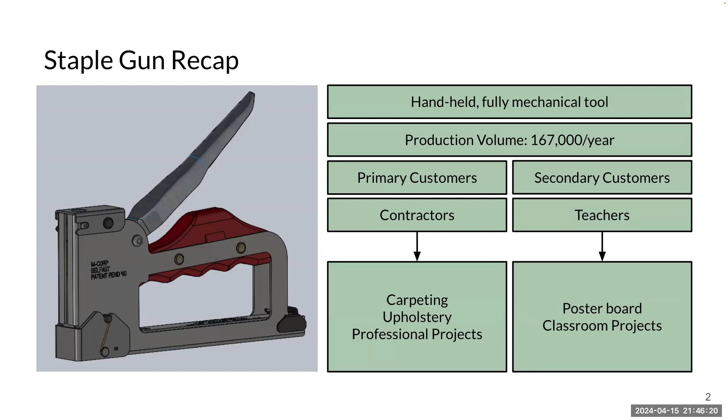Hello, everyone. This is our final presentation on the analysis and redesign of the staple gun. So just to recap, the staple gun is a handheld, fully mechanical tool with a production volume of 167,000 per year. Our primary customers are contractors who are using it for carpeting, upholstery, and professional projects. And our secondary customers are teachers using it for poster boards and classroom projects.

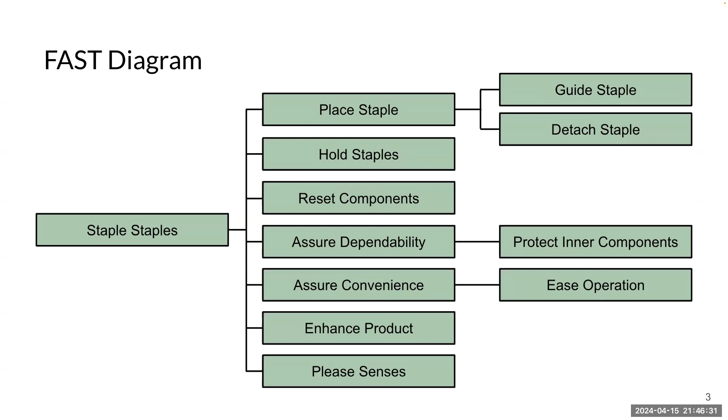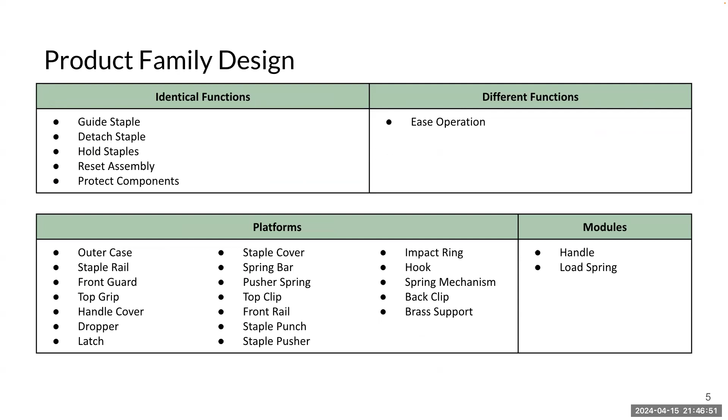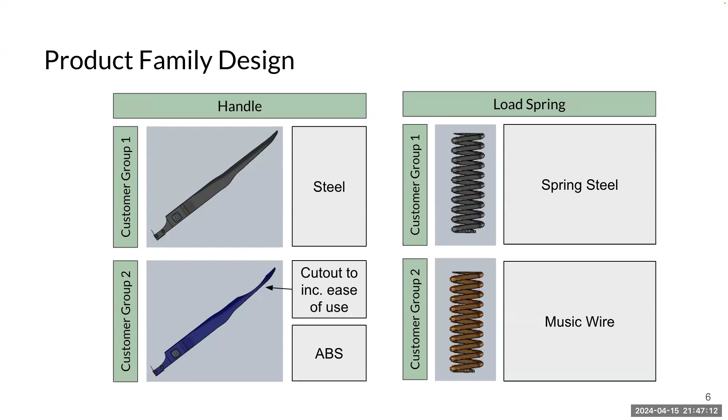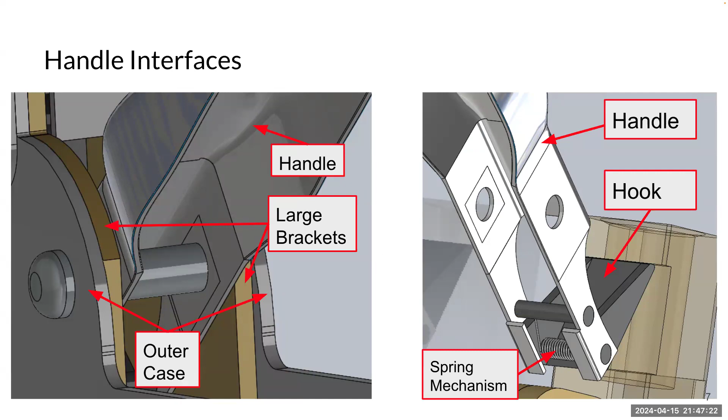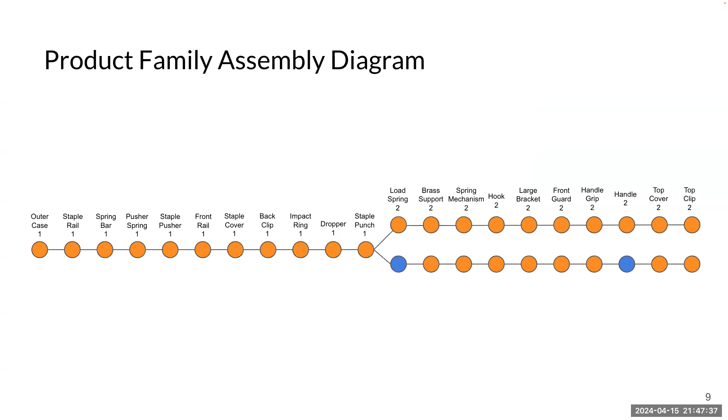This is our product family assembly diagram that has been updated, and it has been built for delayed differentiation. So designing for automated assembly, the main platform component we wanted to focus on was the dropper due to its high functional importance and high manufacturing cost depicted by our quad chart. The components directly before and after the dropper in the assembly sequence are the impact ring and staple punch, respectively. So this was our subassembly of focus to design for automated assembly.

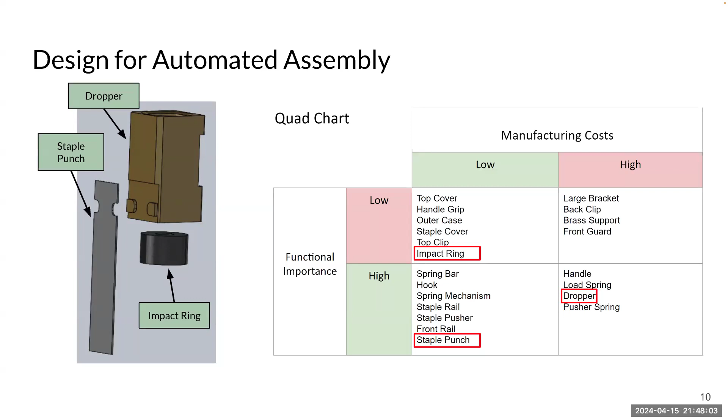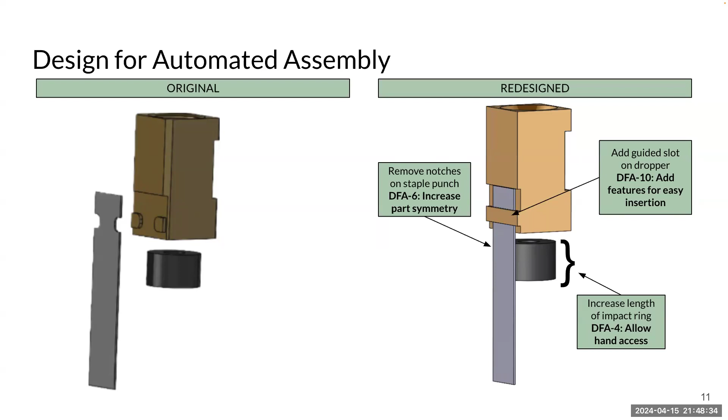In order to improve the total assembly cost of this dropper subassembly, we used the design for automation guidelines to implement 3 design changes. The first change was to remove the notches on the staple punch, which increased the part symmetry. The second change was to add a guided slot in the dropper, which allowed for easier insertion of the staple punch. And finally, the last change was to increase the length of the impact ring from 9 millimeters to 10 millimeters, recategorizing the part from being very small to just small, which allows for easier part access throughout the assembly sequence. As a result of these design changes, we were able to modify some of the automatic handling codes and insertion codes surrounding the dropper subassembly, and it ultimately decreased the total assembly cost by $8.64.

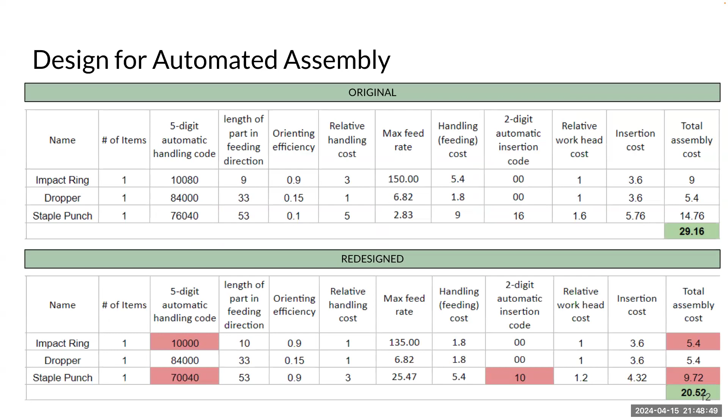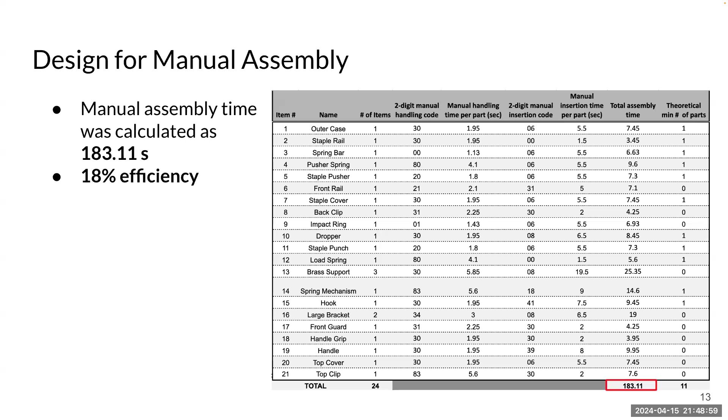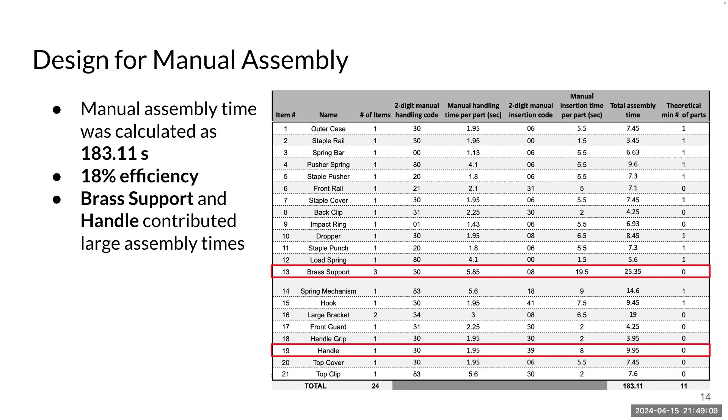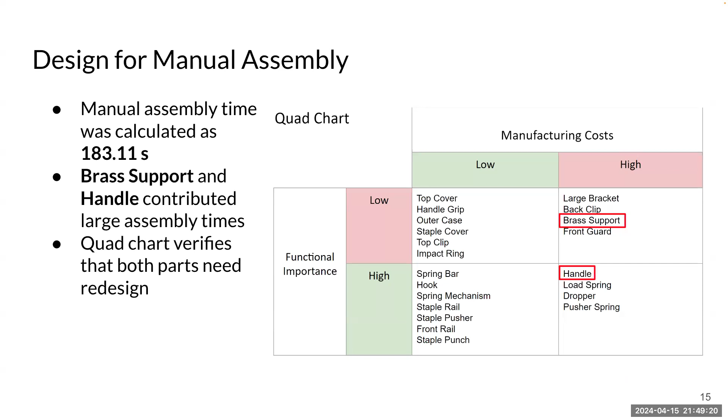The manual assembly analysis was performed for our primary product variant, and the total assembly time was found to be 183 seconds with an efficiency of 18%. A platform part that contributed largely to the assembly time was the brass support, and a module part that had a high assembly time was the handle. Since the handle has a high functional importance as shown in the quad chart, it is important that we redesign it for lower assembly time. The brass support has a lower functional importance, so we tried to reduce its number of parts.

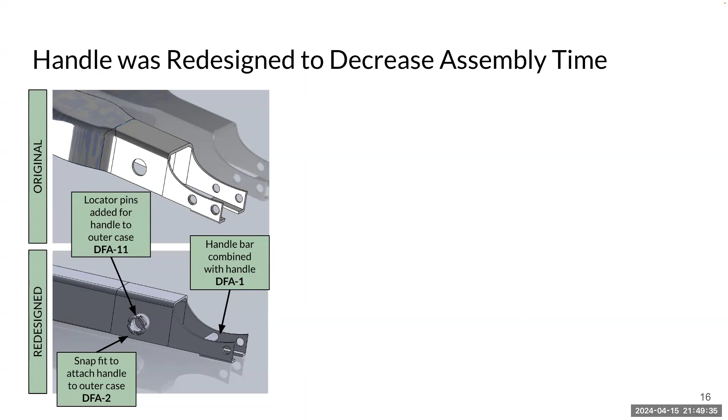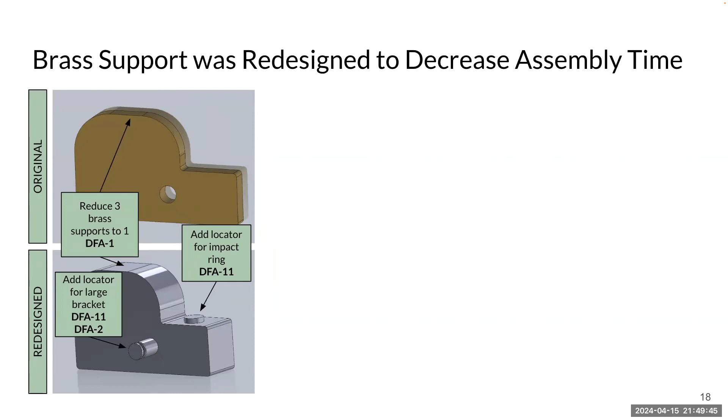The handle was redesigned by adding locator pins and a snap fit for attaching it to the outer case, and the handle bar was combined with the handle to reduce the total number of parts. This reduced the handle assembly time by 6 seconds. The brass support was redesigned by reducing the 3 supports to 1. A locator for the impact ring was added, and a locator for the large bracket attachment was also added, which serves to reduce a fastener. This reduced the assembly time by about 18 seconds.

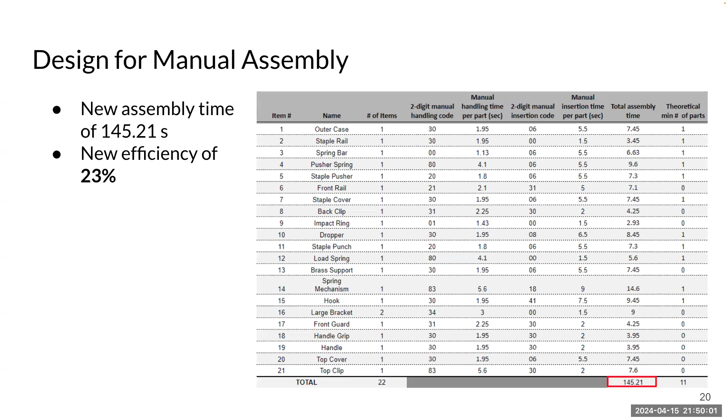All in all, these redesigned parts reduced the total assembly time by almost 40 seconds, and we have a new efficiency of 23%. However, the addition of these locators and snap fits may lead to an increase in manufacturing costs, and the thicker brass stock will likely increase our material costs.

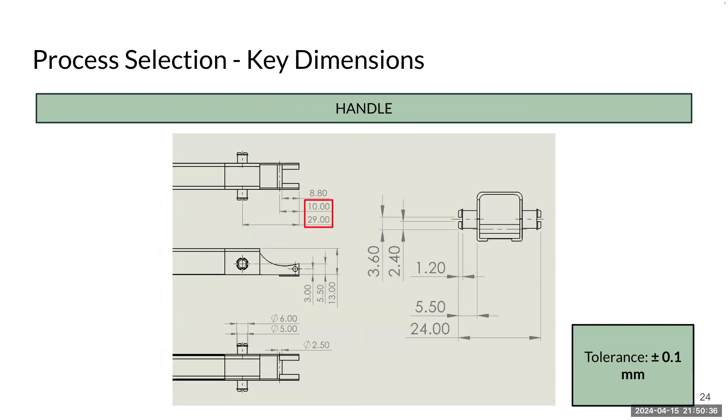We'll now be going into the process selection for which manufacturing process was used for both the handle and the brass support. Shown here are the key dimensions of the redesigned handle. The handle serves to detach staples and ease the operation for its user. Because of this, the most critical dimensions are on the locations of the handlebar and the snap fit. The handlebar is critical for the spring mechanism used to detach the staple, and the snap fit is crucial to hold the assembly together. The tolerances were chosen to be 0.1 millimeters.

Utilizing the 7 process capabilities, we selected 2 candidate manufacturing processes and ultimately chose sheet metal working to manufacture the handle.

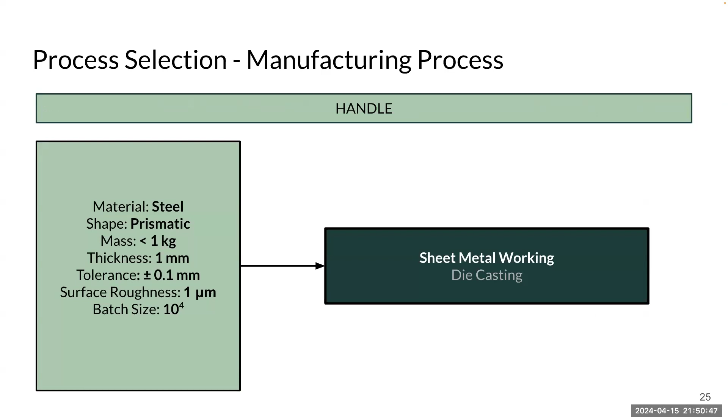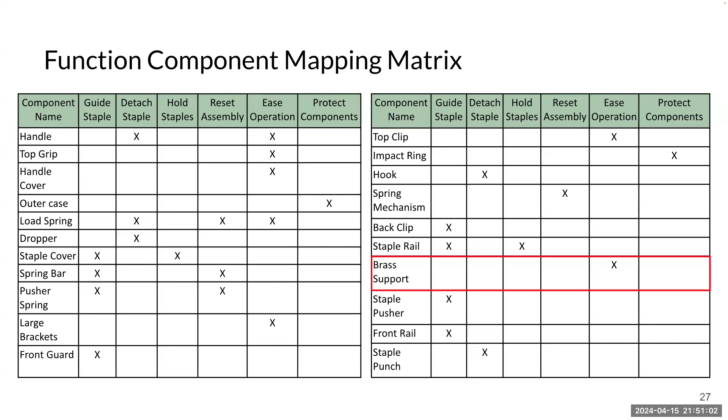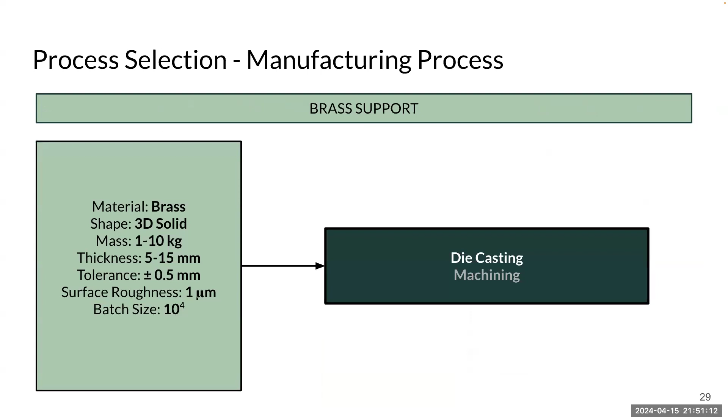So now diving into design for manufacturing for the handle. Before we made alterations to the handle, we first got cost estimates for the price per part. First, using the analytical method and the equation shown above, we estimated that the cost would be roughly $1.95 per part, mostly driven by the high material cost of the stainless steel. And then inserting this part into HUBS and extrapolating for our volume size, we estimated that the price per part would be roughly 10.1 cents.

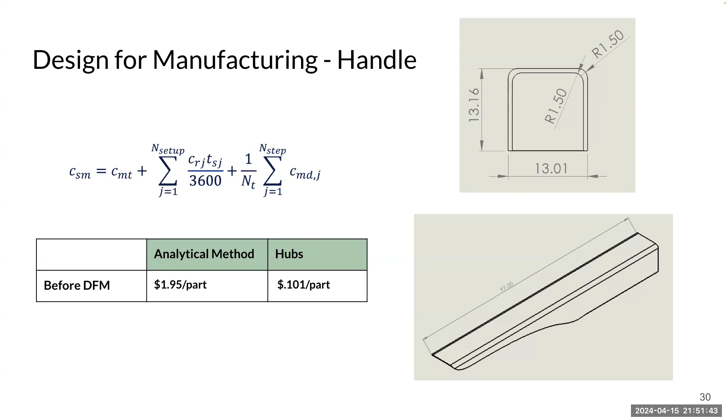Moving on, post DfM, we made some alterations using design for sheet metal working guidelines. As you can see, we added bend offsets to the corners to allow the sheet metal to warp as it bends. Additionally, we avoided sharp bends, ensuring that both radiuses are less than the thickness of the steel. And then finally, we got rid of sharp corners on the part, which was another guideline for sheet metal working.

So as you can see, post DfM, we estimated the analytical method would be $1.89 per part, while HUBS got slightly cheaper at 10 cents per part. All in all, post DfM, the handle was 6 cents cheaper.

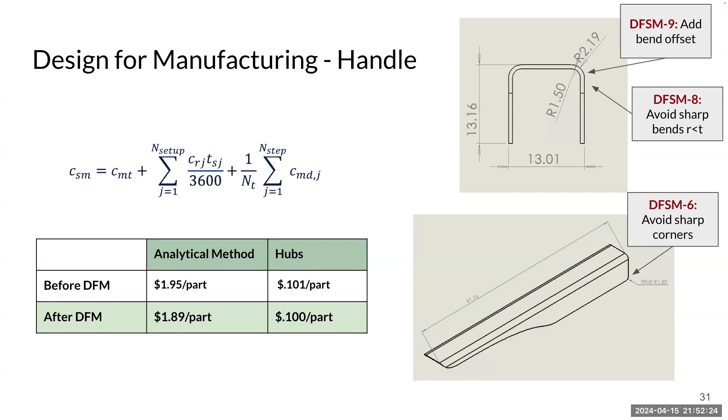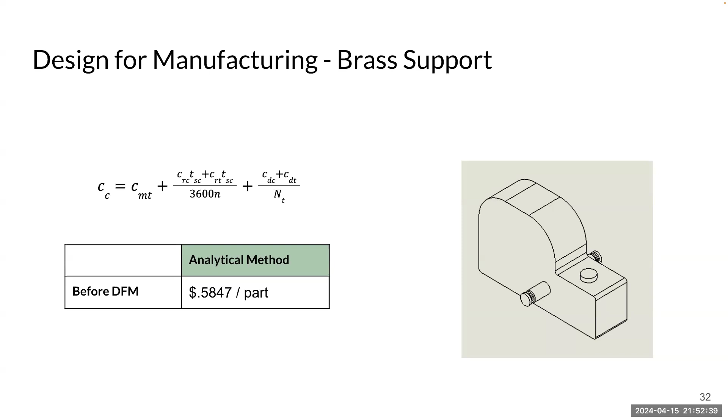The second part we chose to redesign was the brass support. Using the analytical method with the equation shown above, we found that prior to redesign, the total cost for the brass support was 58.5 cents per part. We then redesigned to optimize for die casting by avoiding sharp corners and adding draft angles, which then reduced the cost to 44.5 cents per part.

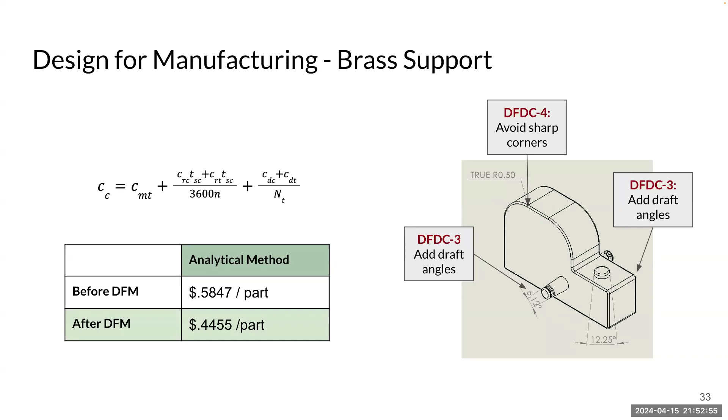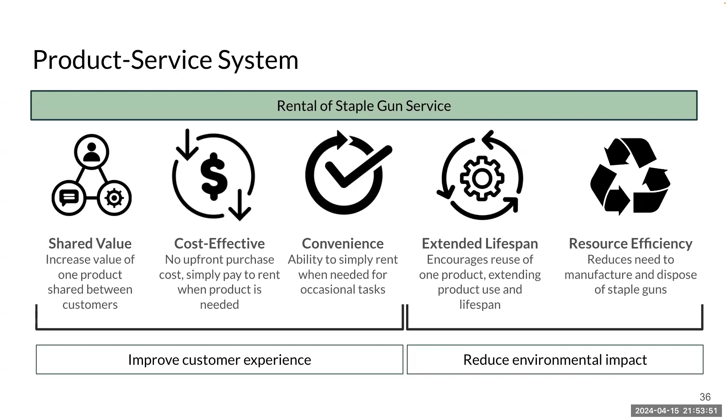Moving on to reducing the environmental impact, it would provide an extended lifespan. So it encourages the reuse of one product, which would ultimately extend the product use and lifespan. It also would be more resource efficient. So it would reduce the need to manufacture and dispose of staple guns, overall reducing environmental impact.

So onto our conclusions. In total, we had a 37.9 second reduction in total time. For the handle, it was a 6 second reduction, and for the brass support, it was a 17.9 second reduction. For the automated DFA, we saved $8.64 per assembly. For the DFM for the handle, we saved 6 cents per part. For the DFM for the brass support, we saved 14 cents per part.

So overall, the main pro of our design is that it saves money and time, and it's a lot more accessible for both of our stakeholder groups, as it improves the ease of operation for both groups. However, the biggest con that we have is that the material of the handle is still expensive, and overall, the assembly is still a lot of parts. So moving on to how we would approach this project if we had to do it again, we might choose a different part than the handle to improve upon. And we might also choose a product overall with more parts to be condensed down through DFA and DFM.